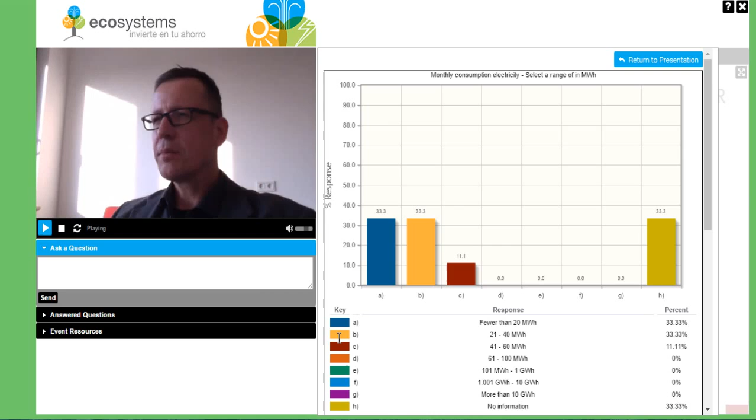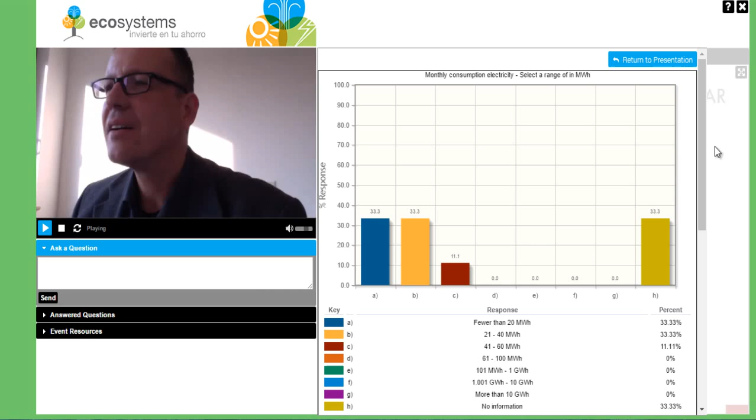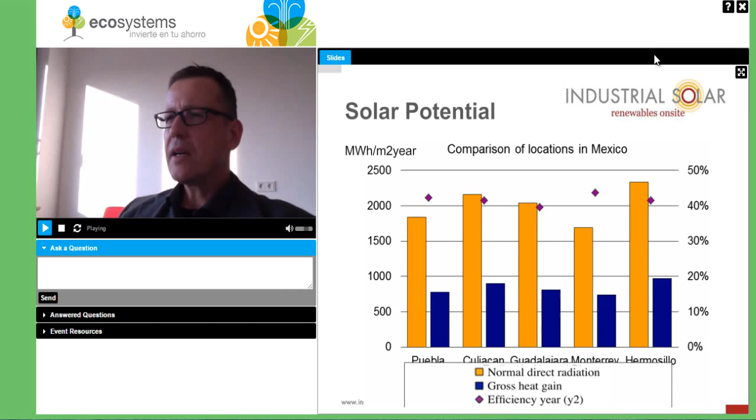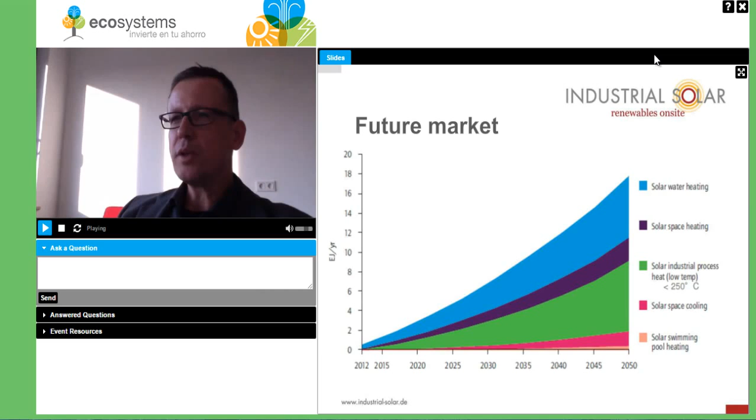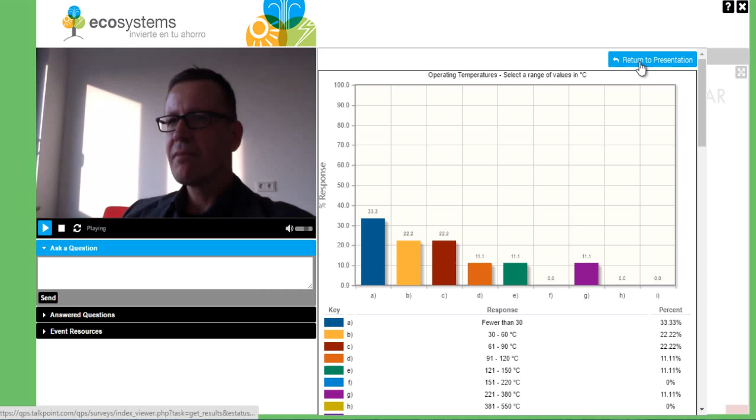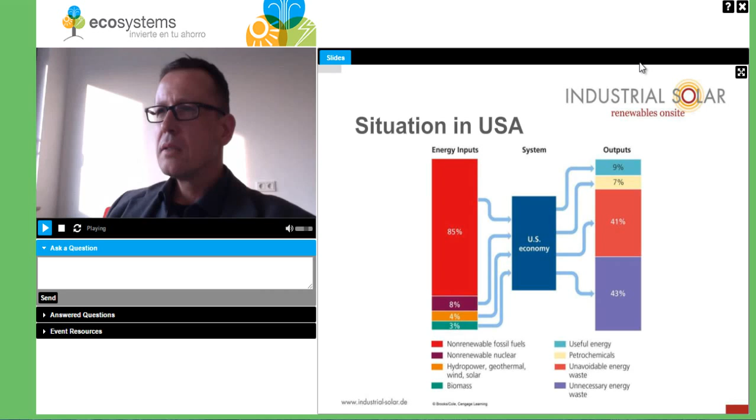So our approach is, when we meet an industrial customer, we start with energy monitoring. We gather the data that the customer has. If the customer doesn't have a good energy monitoring system in place, we can install one. Based on this data, we then do an energy analysis. And of course, we try to harvest first the low-hanging fruits, which is energy savings or energy conservation. In the next step, we improve energy efficiency. And last but not least, we integrate renewable energy technologies.

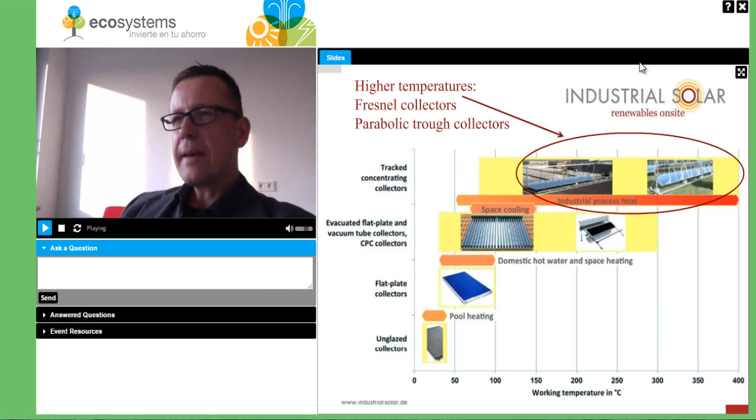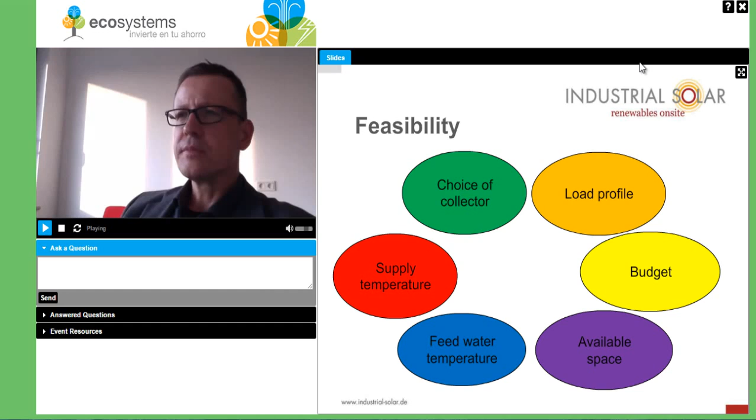And then we can calculate parameters like the net present value, internal rate of return over 10 years or 20 years, payback time, and so on. And we generate some graphs showing you the cumulated cash flow over time. And so we're trying to give you a very clear analysis of the financial situation with such a system.

As I said before, we're trying to harvest first the low-hanging fruits. Of course, like if a customer is heating with electricity, we have met companies that generate steam with electric steam generators. There, it's typically economically very attractive to replace or to combine such electric steam generators with solar technology. Diesel is also very expensive, and if you have natural gas, then you are rather well positioned because this is rather inexpensive. So we are trying to find customers that are using a rather expensive energy like electricity or fossil fuel.

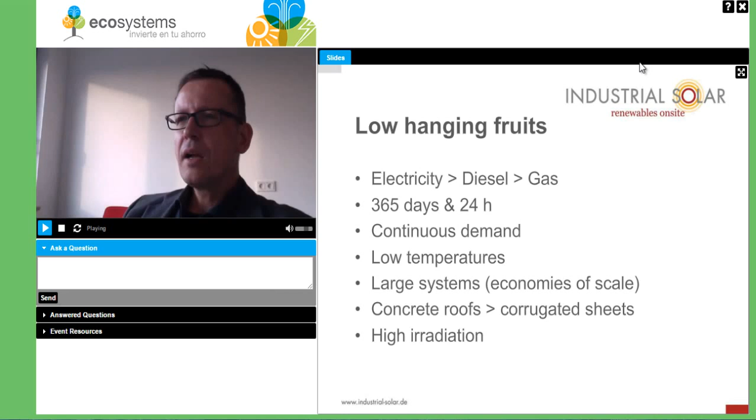The challenges are low energy costs, like we have now currently. The world market price of oil is extremely low. We just can hope that it will go up again. High investment cost is always an issue with renewable energies. You have to buy the system and it will basically provide you energy for the future. So financing is very important for renewable energy technologies.

We have to raise the awareness. This is something we are here now all together today. There's also some issues like missing solar heat for industrial processes specific solutions, that there are not enough companies providing solutions. There are not enough pilot projects maybe, or not enough supporting policies in place.

Some examples of solar process heat systems with different technologies. This is actually an example from Austria. It's a flat plate collector field with more than 1,000 square meters aperture area that is providing process heat to a meat factory in Austria producing ham.

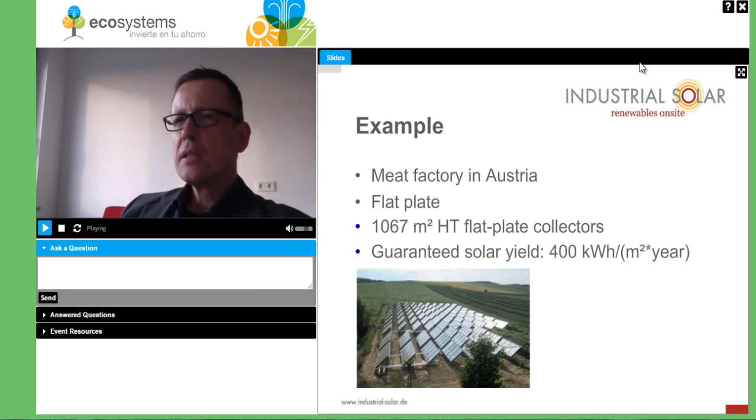Next example is an example from the colleagues of XL. It's a vacuum tube system in Switzerland. I think that's the company Zehnder. They're producing heat exchangers like for space heating. And it's an evacuated tube collector field with about 400 square meters aperture area, providing process heat at 95 degrees C, which is mainly used for a galvanizing process.

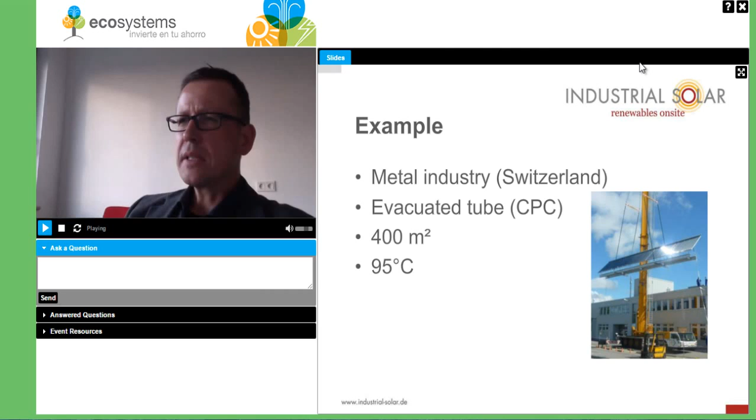A project from ourselves here is an air collector system installed at the pharmaceutical company, actually at Pfizer. It has an aperture area of 130 square meters and is providing hot air, which is used to regenerate a sorption wheel that is used again for a drying process.

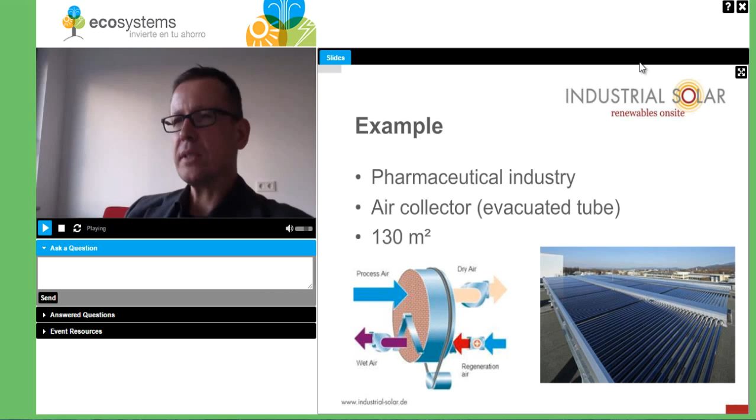And last but not least, a project with our Fresnel collector that we realized at the pharmaceutical company in Jordan. This collector is providing steam. We do have a technology called Ruths storage, so we have a short time buffer storage for steam. The collector field is generating a two-phase flow, a mixture of water and steam, which goes to the steam drum, where it is separated, and the steam drum actually acts also as a buffer.

So if there is a cloud going over the collector, we still have 50 minutes buffer time, and there is still the fossil-fired steam boiler. And the system is performing very well, and we are currently working on some leads in Jordan.

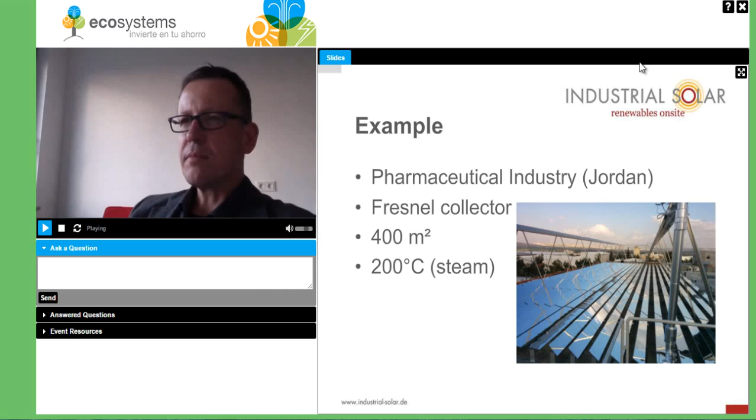Yeah, some further aspects. What is important when we talk with industry? What is the demand? What can you supply? What solutions are available? What technologies are viable in terms of risk and cost? This directly goes to feasibility, financial feasibility, economics, and as mentioned before, financing seems to be the key to the introduction of solar technologies to industry, because no industry can finance such a system out of the working capital,

so you need a loan. And we, as a solution provider, try to help you get this loan from a development bank or some other institution, or even commercially. We have financial partners that can offer you contracting solutions, meaning they do the investment and you pay for the energy. So you have to sign a power purchase agreement, a PPA, for so and so many years, and then the financial partner will do the investment.

And of course, we try to maximize local value, because it doesn't make sense to ship material from Germany to all over the world. So we have recently won a prize in Germany, the innovation prize for environment and climate, and we won in the category technology transfer, because we have shown with our projects like in South Africa and the one in Jordan that we can reach a very high local value, that we do the installation and assembly with local people, so that we are not trying to sell solutions made in Germany to the rest of the world, but that we are taking the solutions to the countries where we have the problems and where we have to sell.

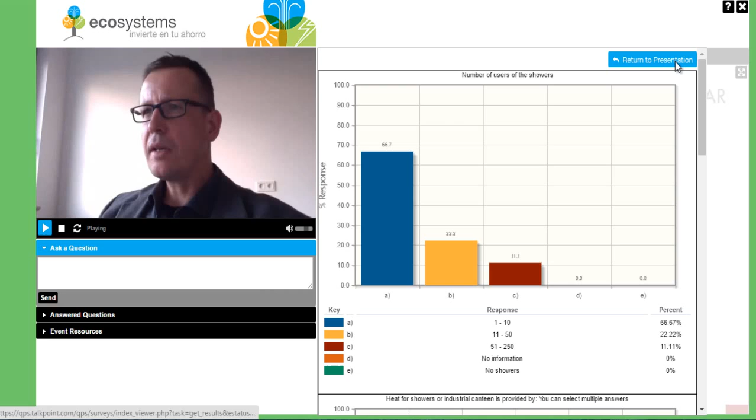Summarizing everything, there's a great potential for solar heat for industrial processes, abbreviated SHIP. The relationship between SHIP and the solar thermal market, it's a complex market. It's not easy to introduce this technology to industry. We have to raise the awareness. We have to basically realize this huge market potential,

and we are optimistic that we can do this with partners like GIZ in Mexico and other countries, and we are very glad that we have the support within our Solar Vapor project that is subsidized from Germany and Mexico, CONACYT, and I think this will bring us forward, and I'm looking forward to more webinars, and I'm looking forward to the first installations now in Mexico for industry. Thank you very much.